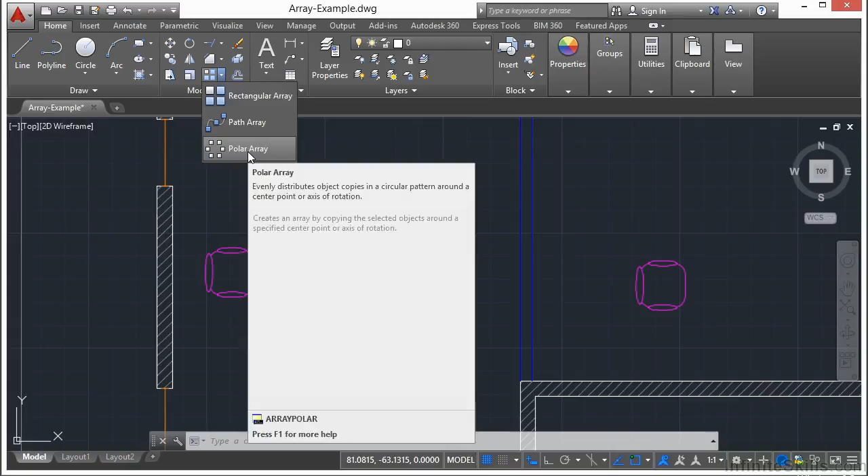So let's pick the chair, press return. And now we have to specify the center point of the array. That's going to be the center of this circle right here. And you can see, boom, it just pops them right in there for us.

Now, the polar array works almost identically to the rectangular array. You get a contextual array ribbon called the array creation, and you have all these other options available to you. You also have grip edits that you can change the angle with, and you can also change that length right here. Once you do that, you can change the number of chairs or objects that will be arrayed in that area.

So if I pick this here and I stretch it enough, it'll keep everything really close, really tight, or 360 degrees. Of course, all of these controls are up here and available to you.

So I can control the number of items. Let's say it's 5. I can control either the angle between them or the fill angle total, whichever one I'd like. So if I say this needs to be 180 degrees, and there are 5 of them, they're going to be 45 degrees apart. Or I can go to 360 degrees, back the way I had it.

And I can change this number here, say I just pick randomly 56. It'll change the fill number for you automatically. So it just depends on what you want to do.

Now you can change the number of rows. Let's say I need 2 sets of chairs. If I type in 2, it will give me 2 chairs, and all of the items are going to come out radially.

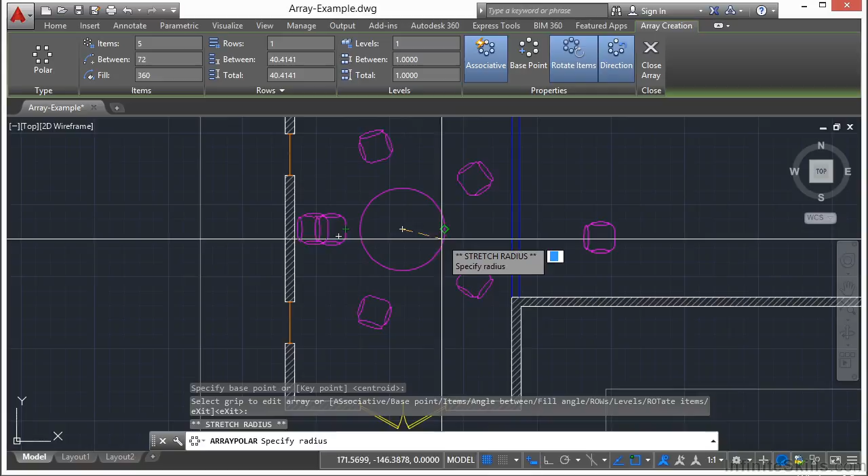I can change my base point this way if I'd like, and this makes it associative. If I turn that off, then I won't be able to edit the chairs as a group later on. Once I change this, it shows how far away my chairs are from the center of my base point option. I'm going to undo all that and start all over.

If I go to my polar array again, select my chair, press enter, select the center of my table, and I get this all right here. So it's actually very simple to do and very quick, as you can see.

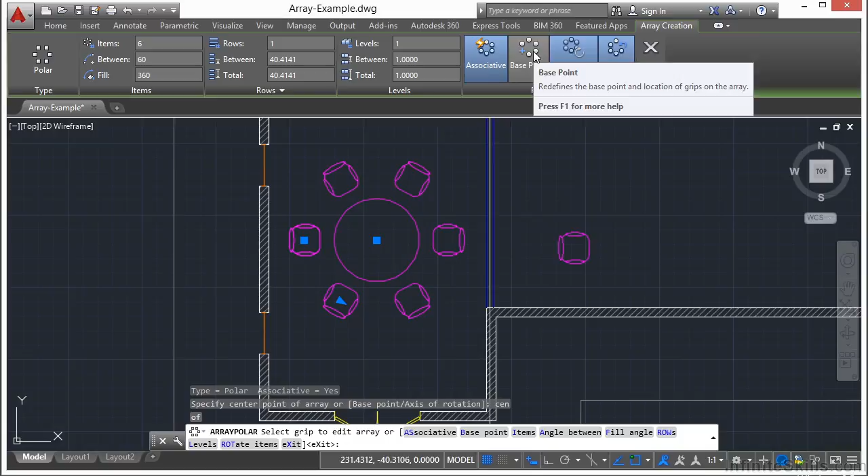Now, if you change your base point, that's going to redefine where the location of the grips are going to go. Now, when I'm done, I click close or press the enter key, and I have an associative array again. Once I select it, I get my contextual ribbon back, and I can make all the changes that I want to here as I'd like.

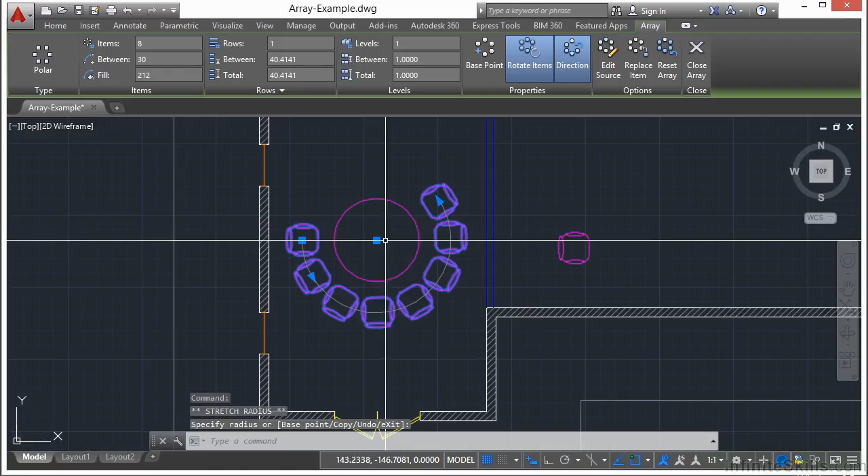If I do that there, I can also change some of these options with my grip edit, just as I did before. I can stretch these out, make them a little closer, a little farther away, and here, this grip will let me move them as a group.

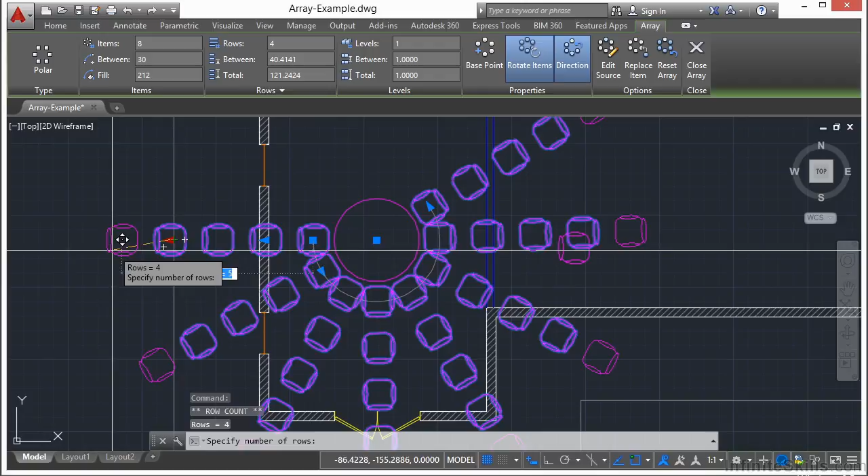If I hold my mouse over my grip edit, I have a couple of different options. I can change my row count and get a lot more chairs. I can change that radius. And then once I have multiple rows, of course, I can change those grips this way as well.

So that's the polar array. It allows you to make polar radial objects very quickly.